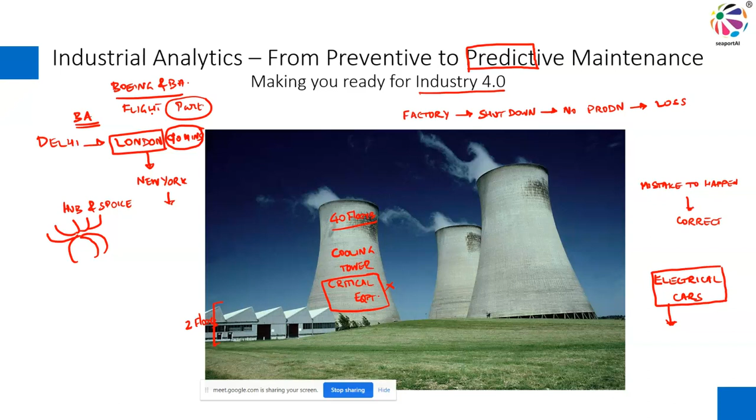That is where machine learning is going, right? Because we don't want breakdown and all that. And moreover, in a large factory, the high impact failures will typically have low frequency.

It is like if you are a bright student, a topper. A topper may also fail in a subject, right? Possibility is there. A topper who has consistently studied well throughout, from school to college to PG, that student can also fail, right? But it is a low frequency. Maybe that student will fail only in one exam out of maybe thousands of exams that individual takes.

That is how it's a low frequency event but high impact. It will be very damaging, the topper will feel really bad. That is how it is for the critical equipment.

So ensuring the uptime, right? You are driving a two-wheeler or a car, you need to ensure the car is running well. And still there are many equipments that are monitored manually. We are talking of Industry 4.0, but even big companies have equipments that are monitored manually.

So that is where, in monitoring assets, we move from preventive to predictive. The existing techniques to identify failures are non-destructive testing and statistical process control.

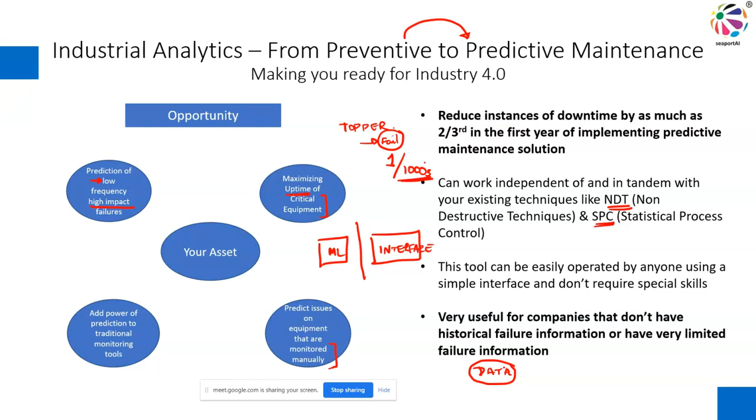So the other thing you need to be aware of is this: AI is the vision, machine learning is the technology. How will I use that? You need to learn something like Python as the programming code.

But today we are moving away from that. Just to give an example, you all know the IRCTC website, to book train tickets. To develop this IRCTC website, when I started my career 25 years back, you probably had to write 30,000 lines of code. That is code heavy.

In low code, we are possibly talking of about 10,000 or even 5,000 lines, because many things are automated. In no code, we are talking of zero code. Absolutely nothing.

Automation is not just happening in the mechanical industry, it is also happening in the world of programming. Because what is no code? I have automated programming. It is programming that drove automation. It is only because of computer programs that you can operate machines automatically.

But automation is happening to the programming also, you can call it reverse automation. So that is the tool I'm going to demonstrate. It is through these no-code approaches that you can learn machine learning. Even a mechanical engineering student, electrical engineering student, instrumentation engineering student, chemical engineering student, civil engineering student, they all can learn. You don't need to know Python programming.

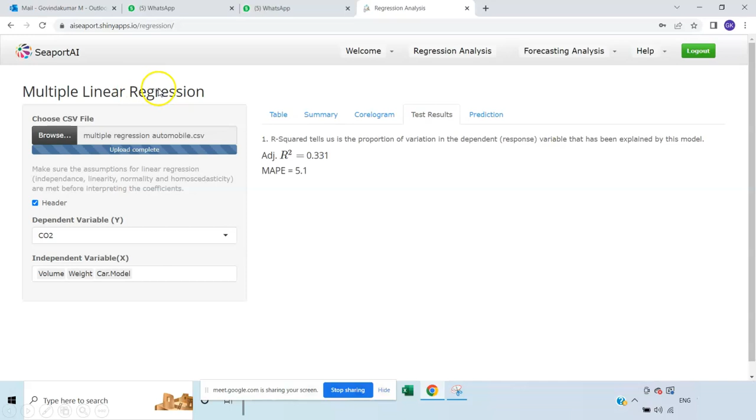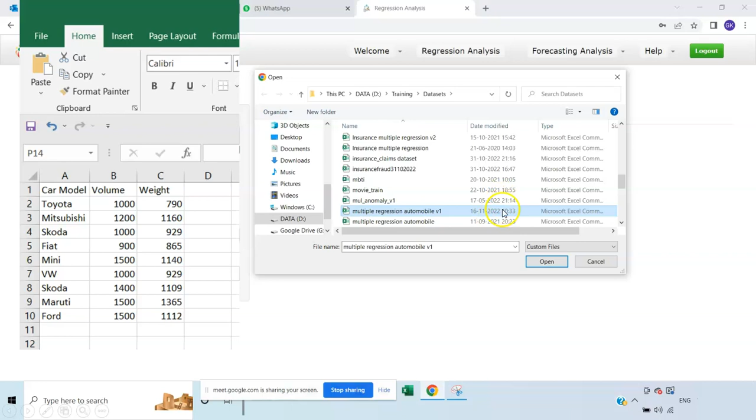So I'm going to feed one where only the car model, volume, and weight is there. You see that this field is empty, right? So let me choose this. I have this. This is a simple file, so it came very quickly. If you load a large file, it will take a bit of time. That's all. So the predicted information, what is predicted? That is the carbon dioxide emission. I can download this also.

Now the same thing, I can do as a computer program. I can develop it using Python, or I can use any software. But for mechanical engineering discipline students, you don't need to know programming. You need to know the concepts. You need to know the accuracy. You need to know how to infer this value. You need to know how you can predict.

Let me show you one more thing in the forecasting analysis. So what I'm trying to do here is forecast the future. I'm trying to forecast the future. So I will upload the data. It can be used in demand planning, right? Automobile sales. So I am uploading this file.

TS data, forecasting, the loading is complete. How many forecasting points do you want? This is daily data I have loaded for the past 5 years, so 365 into 5. I have data points for that, but I want 365, because I want to predict. So I just enter 365, and I'll say let's go. Are you sure the data is uploaded? Yes sir, it's uploaded. We will wait for this to be complete.

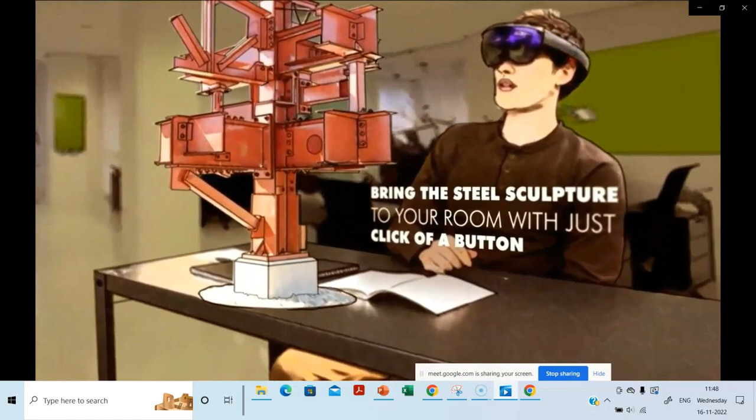There is no sound coming from the video, just some background music. Let me play it. If you see here, what is the person doing? He is wearing what is known as a virtual reality glass. There are a lot of such glasses available; the famous one is HoloLens by Microsoft.

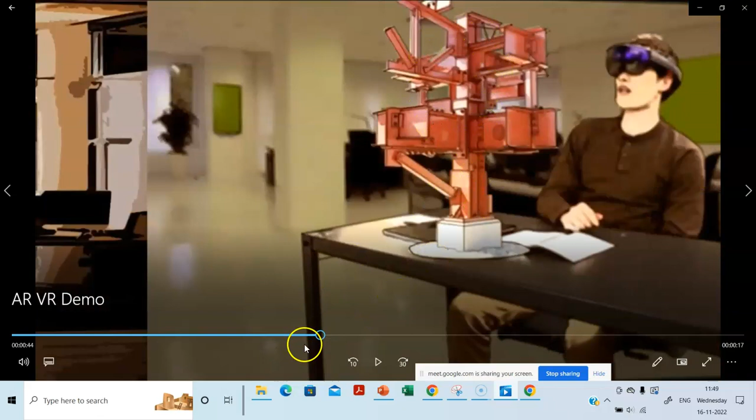Once you wear the device, you can visualize the entire thing in 3 dimensions. Let's say as part of learning about a particular equipment, you can bring the entire thing here - I'm talking of a steel sculpture - with just a click of a button, while sitting in a conference room. Let's say your professor wants to explain about an equipment. How will he explain? Today he will use a computer. Previously, 10 or 15 years back, he would have used projector sheets.

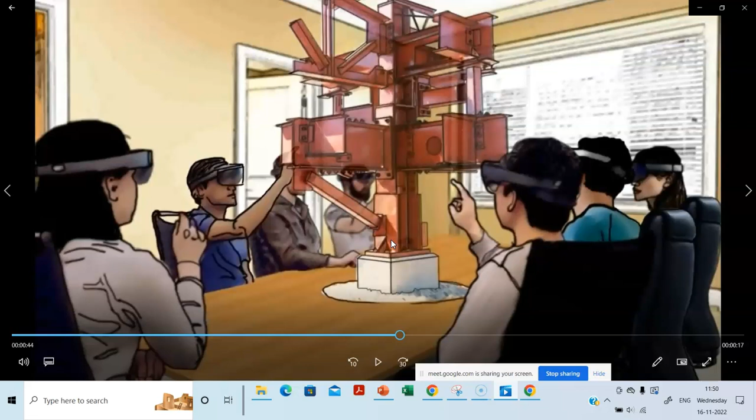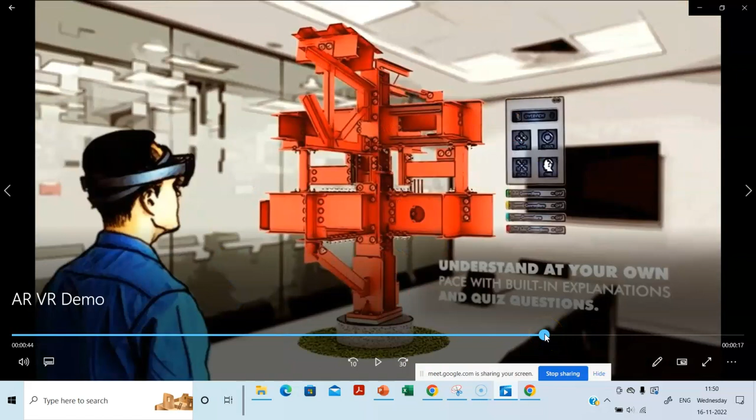But what is the current thing? It is about AR VR. So bring the entire equipment - see here, they are all sitting in a conference room, and you can rotate it and understand how to operate it. If it is a cooling tower, how will you go inside? I told you it is 40 floors - not everybody will go inside, only some specific people will. And let's say you have joined recently - how will someone train you on the cooling tower?

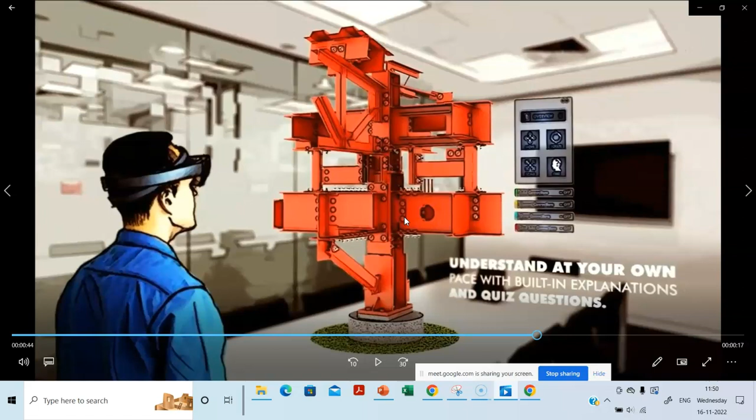So you have this entire thing in 3 dimensions, where you can see this here - he is operating it. It points to a lot of things. If somebody wants to give a demo of a tool, you don't need to worry about that.

So what I showed you is known as augmented reality, not virtual reality. In virtual reality, you just see it in 3 dimensions. Augmented reality is where I bring the real life object into a conference room. That is where the technology has grown.

I'm sure in future, maybe another 5 years, I am not in Delhi, Arunjit is not in Delhi, we are in different cities, but we will be sitting right next to you through AR - my own image of myself will be there. It's like a metaverse, but in metaverse they are talking only of avatars. I am talking of a technology where my physical presence itself is there - that's where augmented reality and metaverse are going, breaking all physical boundaries.

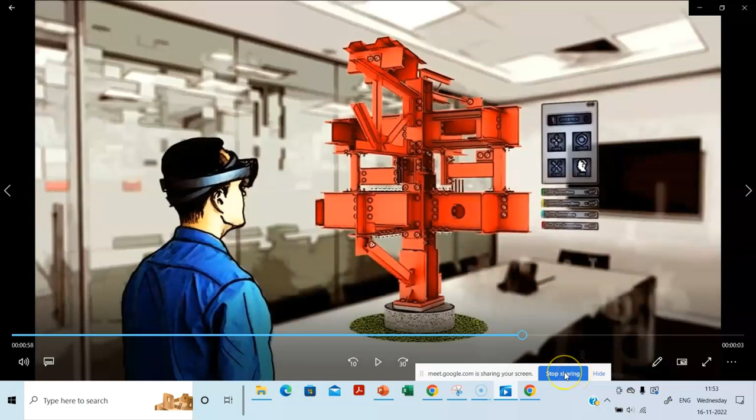So this is the technology of the future. That is something very important to the mechanical engineering discipline. With that, we will conclude this session. Thank you.